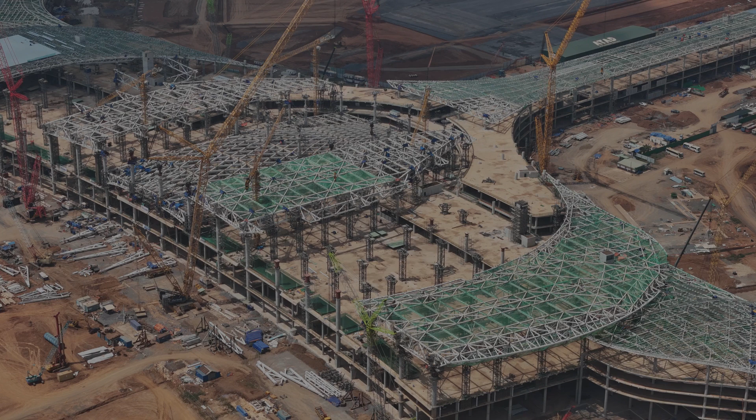A comparative study on the design of a two-story car showroom using pre-engineered buildings, PEBs, in accordance with British standards and Euro codes. This important article is authored by the following scientists.

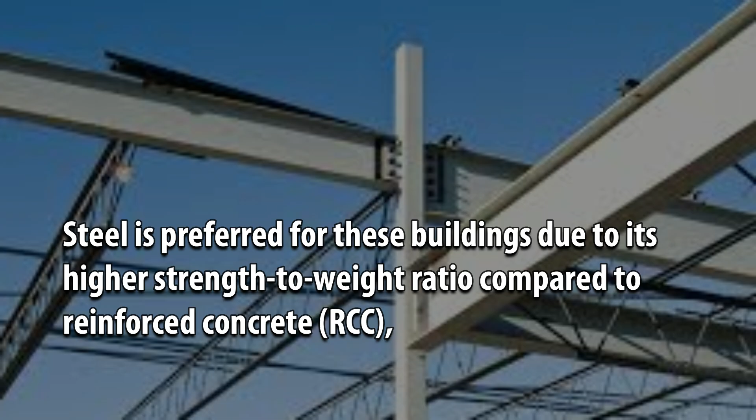Steel has been used as a construction material for a very long time. Most steel structures are used for low-rise, single-story industrial buildings. Steel is preferred for these buildings due to its higher strength-to-weight ratio compared to reinforced concrete, RCC, and because it allows for larger, unobstructed internal spaces with long clear spans between columns.

Pre-engineered buildings, PEBs, represent a modern approach to structural steel utilization, optimizing design for economical structural integrity. Structural members are designed and fabricated in a controlled factory environment to produce optimal sections by varying member thickness along their length according to bending moment requirements.

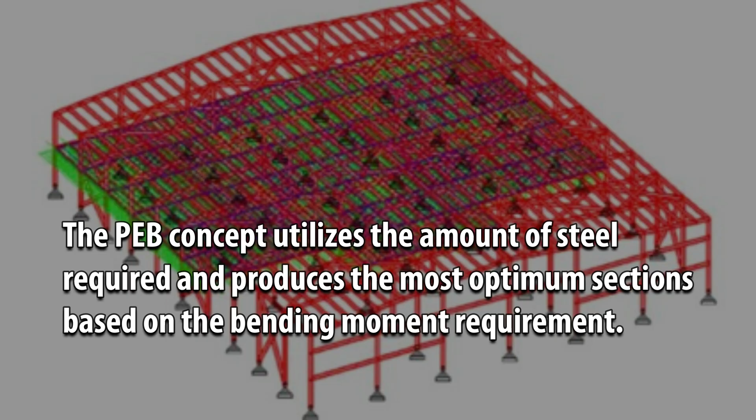The PEB concept utilizes the amount of steel required and produces the most optimum sections based on the bending moment requirement. The actual model of the PEB structure of the car showroom was created in STAAD Pro software.

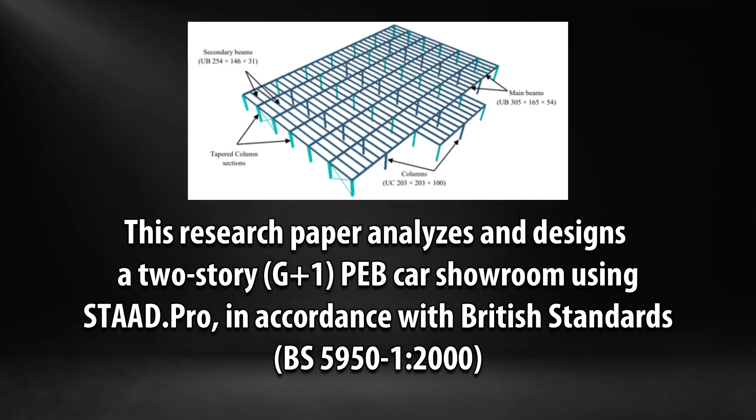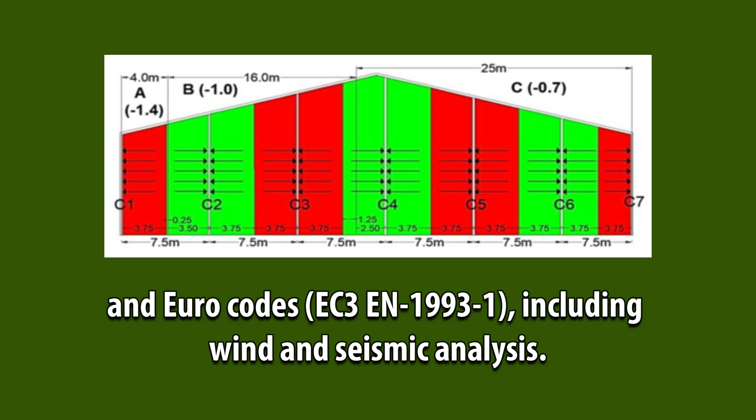This research paper analyzes and designs a two-story, G+1, PEB car showroom using STAAD.Pro, in accordance with British standards, BS 5950-1:2000, and Euro codes EC3 EN 1993-1, including wind and seismic analysis.

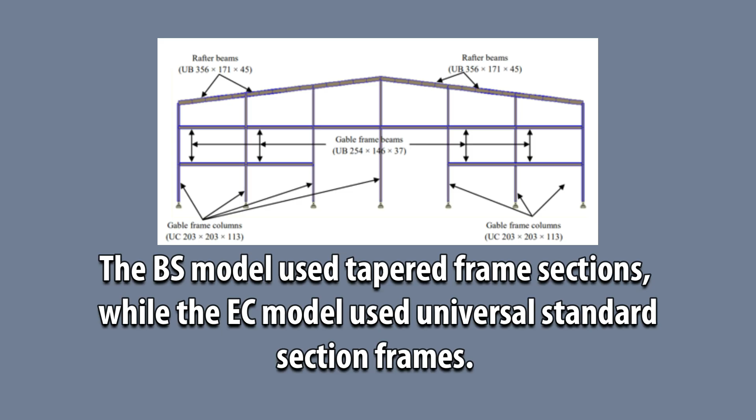To achieve this, two models of the car showroom were created in STAAD.Pro, a British standard, BS, model and a Euro code, EC, model. The BS model used tapered frame sections, while the EC model used universal standard section frames. Both models were analyzed under dead load, live load, wind load, and seismic load. Wind and seismic loads, being critical dynamic loads, were analyzed to assess structural stability against lateral forces.

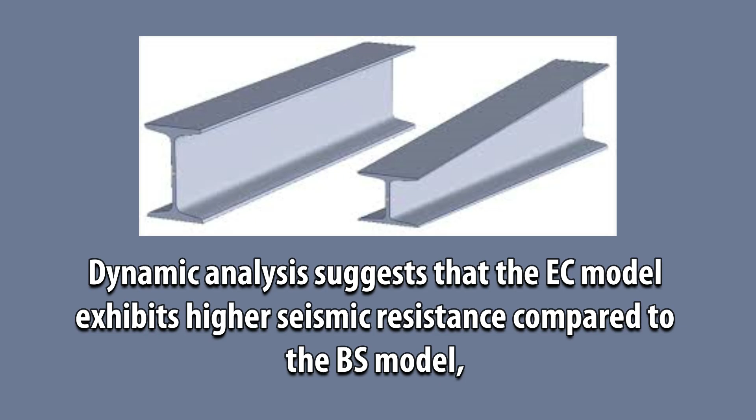The analysis and design results for both models were within allowable limits for ultimate and serviceability limit states, as the internal stresses in all members satisfied the unity check ratio requirements for both design codes. Dynamic analysis suggests that the EC model exhibits higher seismic resistance compared to the BS model, as the maximum displacement in the X direction was 8.83 mm for the EC model and 10.5 mm for the BS model.

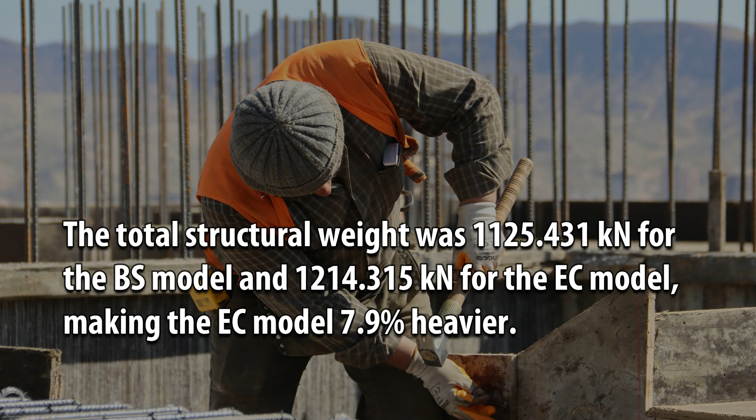The total structural weight was 1125.431 kN for the BS model and 1214.315 kN for the EC model, making the EC model 7.9% heavier. Furthermore, the total weight of all portal frames was 457.26 kN for the BS model and 574.725 kN for the EC model, indicating that the tapered frame sections in the BS model reduced steel usage by 25.7%. Therefore, the BS model proved more economical compared to the Euro code model.

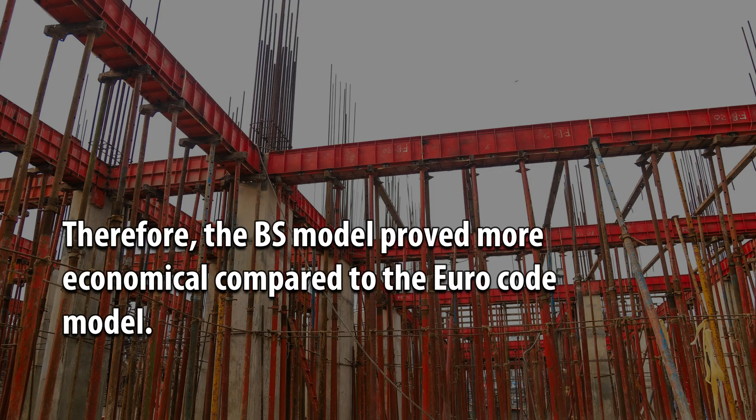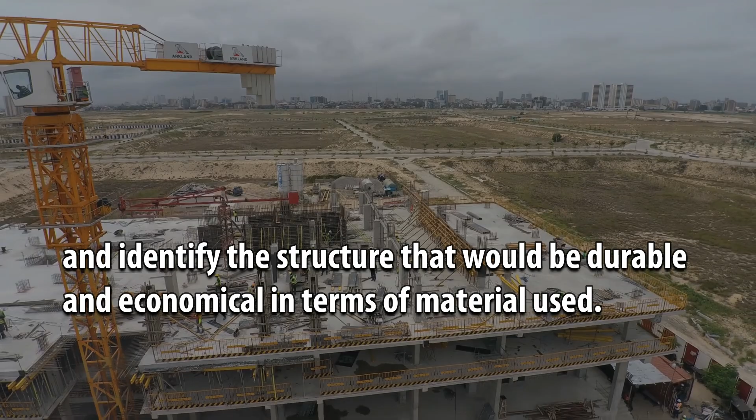In order to determine the most cost-effective method of designing the PEB car showroom using British standard and Euro code, it is crucial to compare the design results of the two models and identify the structure that would be durable and economical in terms of material used.